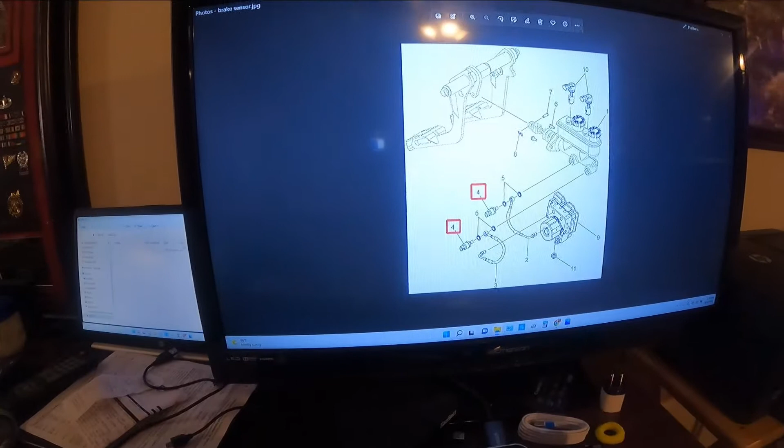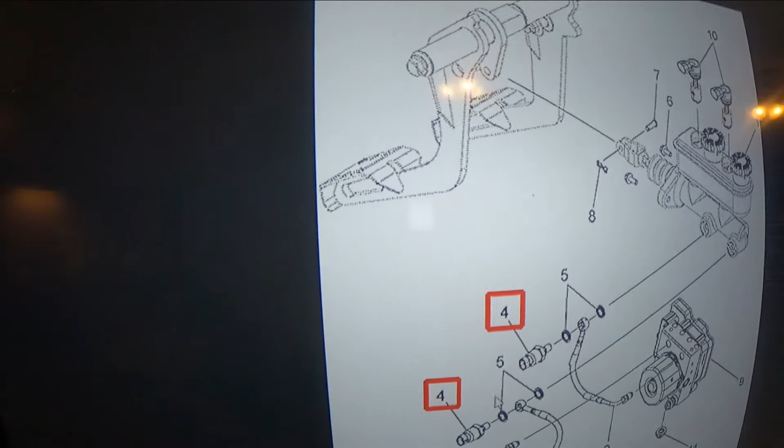So this is the master cylinder for the Slingshot. You'll have your two sensors up here, and then these two sensors right here in red are the ones we're going to replace. In the kit it comes with these two sensors here and four washers with O-rings in them.

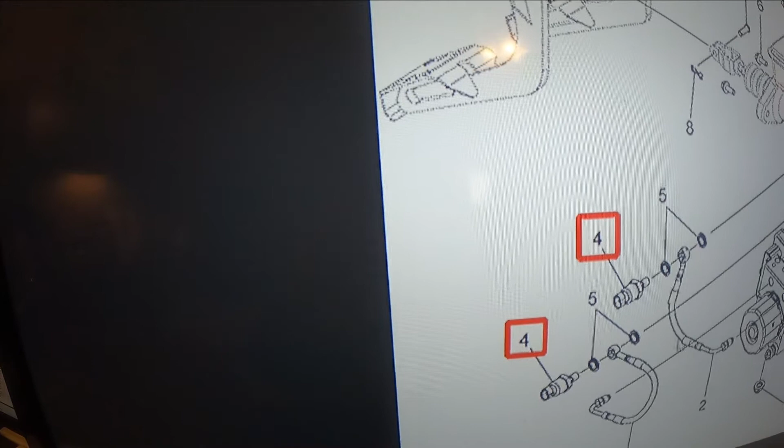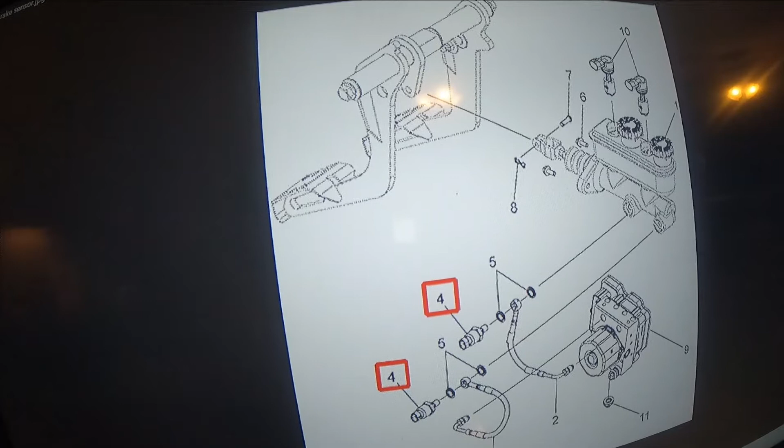And then these little brake lines right here are already on your Slingshot. Now you really can't see this on the Slingshot because it's hidden behind a tube that runs right along this master cylinder. So when we get out to the Slingshot, I'll be able to show you that, and then I'll show you here in a second where I got it from Amazon.

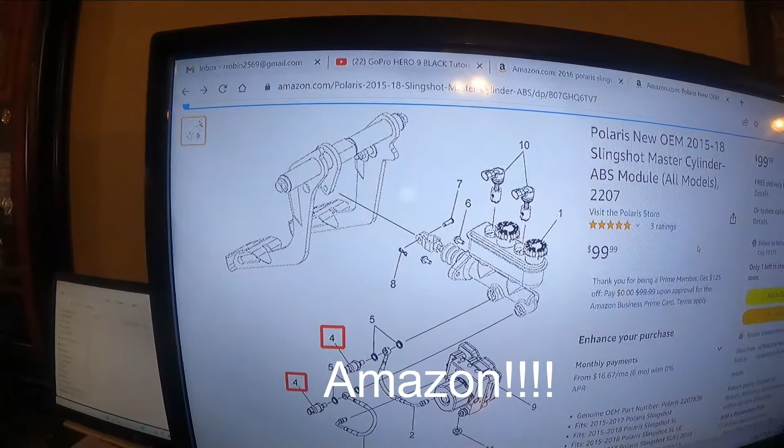So this is where I got it from Amazon, and I'll put the link down in the description. It's for a 2015 to 18 Slingshot master cylinder ABS module. It was $99, and these are all the different models that it fits.

Without further ado, let's go outside and see what we can get into.

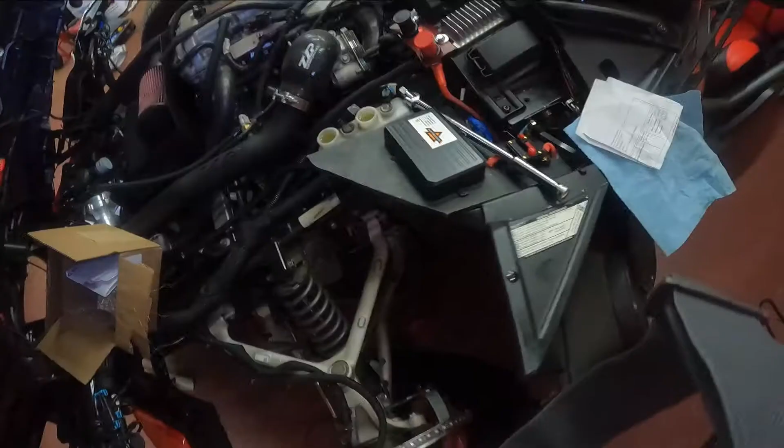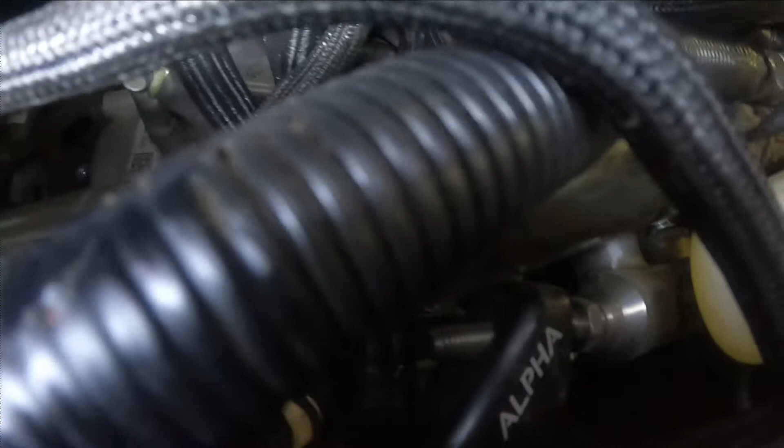All right, so here's your master cylinder. Of course I've taken the tops off, and the piece that you want to replace is down there. That silver piece is the back one, and then the front one is a little further up right there. So basically they're a 3/4 or 19 millimeter.

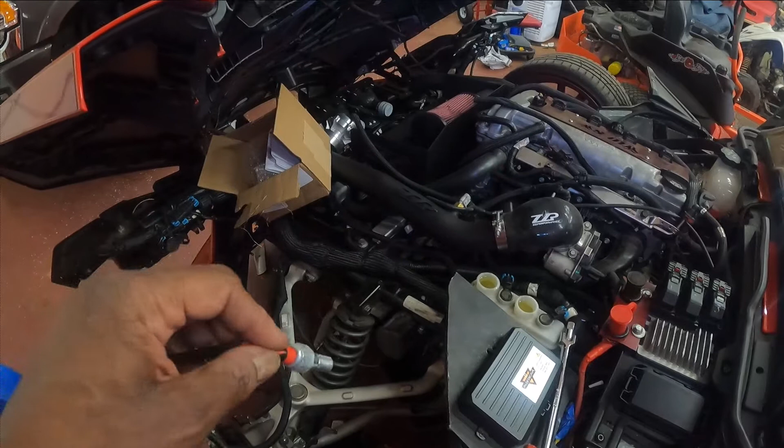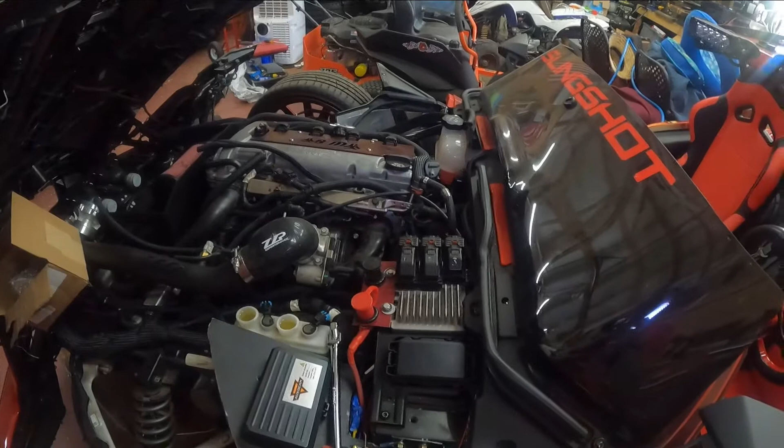So these are the old ones. I've already replaced them. I'm just trying to catch you up to what I've done so far. Again, in the box you'll get your instructions on how to replace these.

And this is what the new ones look like. They're black.

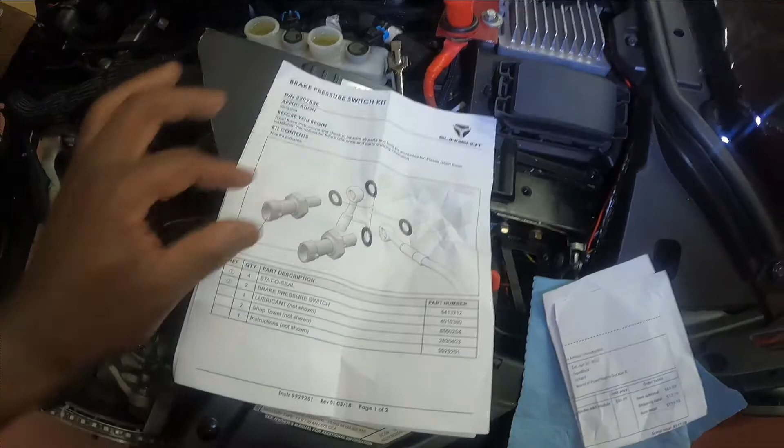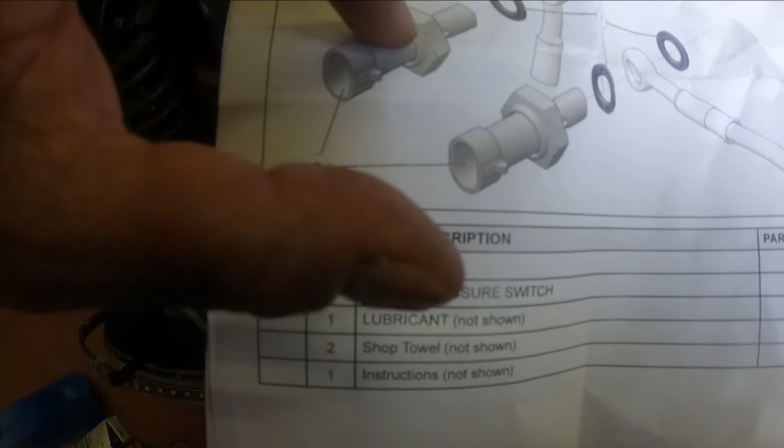This is the way you put them together. You got to have that silver O-ring with the black grommet in the middle. You stick it on first, make sure it goes all the way against this nut right here. Then you stick your brake line on, and then you stick the second washer on, and then you screw them in.

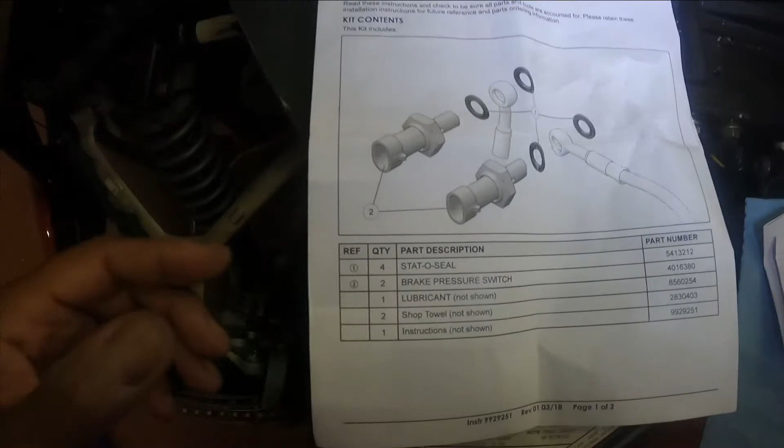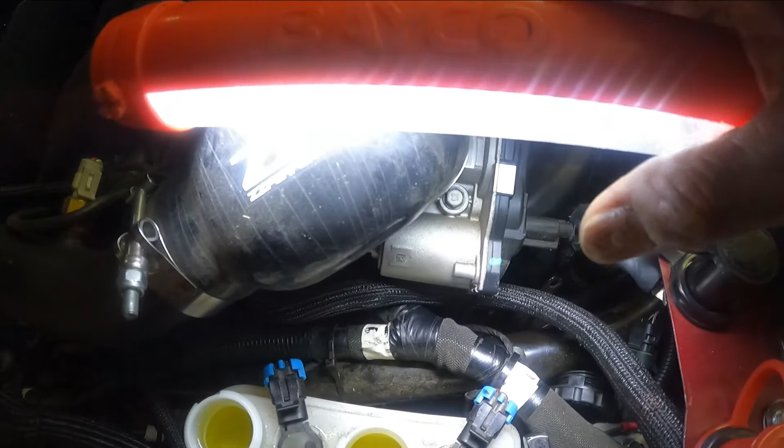The best way I found to get to this back one, so you don't have to take the manifold off, which is this black thing right here. If you don't want to have to take all that off, along with your throttle body and all that good stuff, you can get a wrench down here to be able to tighten it. And of course you're only going to get like a 1/4 of a turn, but you still can get to it from right here.

This one over here, you'll probably have to take a wrench and go behind this cable right here, this wire loom, or you can get to it from down on the side here.

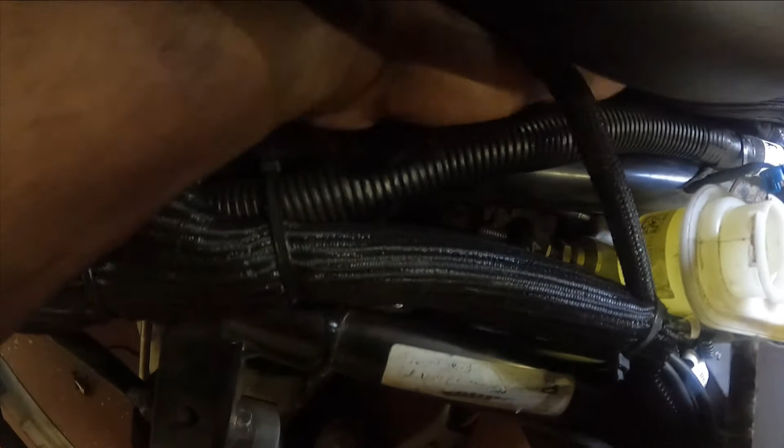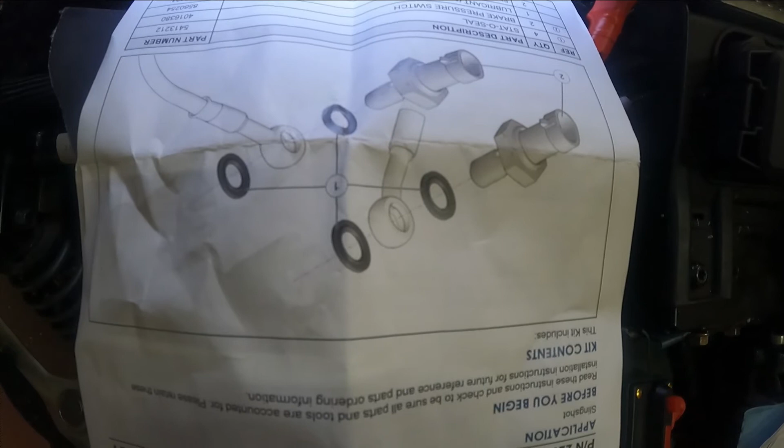Again, when you look at these, this is how it looks. This back one goes straight down. This one on the left side, this front one, goes to the left. So just make sure you orient those to the way they're supposed to be.

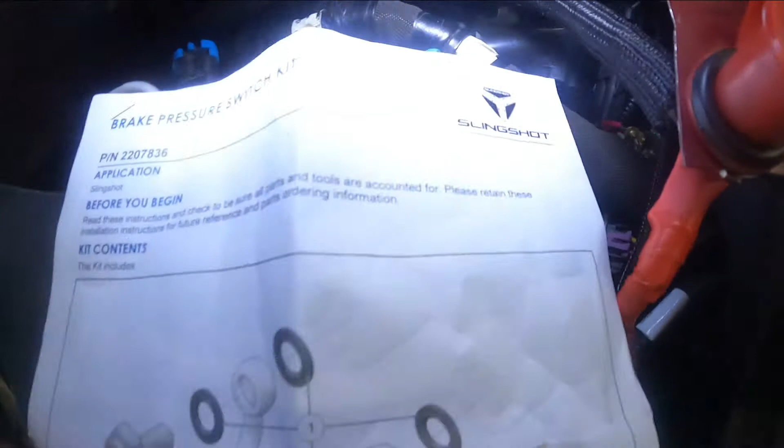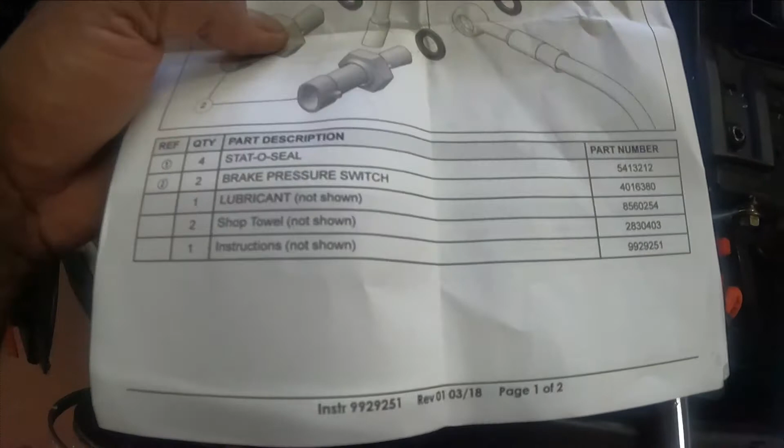Again, this is an actual Slingshot 100% OEM part. There's your part number, and down here is everything that's in the kit. Again, I'll link all that in the description.

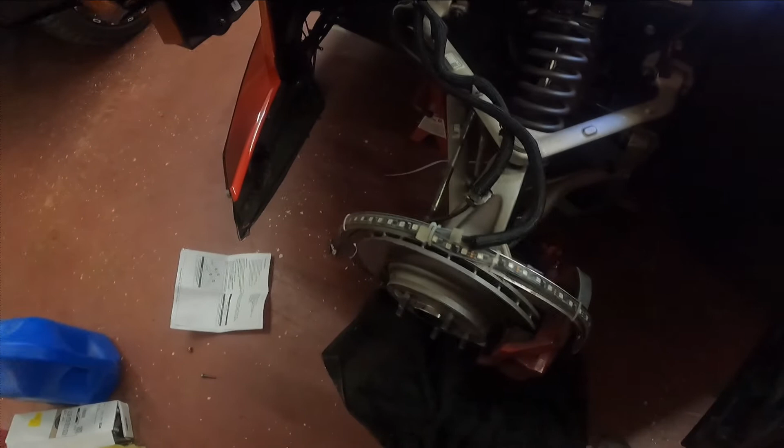I have taken my tire off so y'all can actually see this thing bleed. And of course I spilt some down there, but that's okay. We'll get that cleaned up.

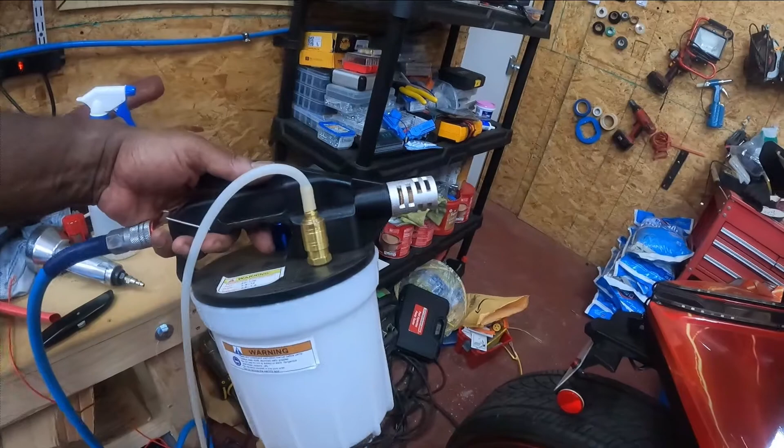So what I have to bleed these is this brake bleeder kit. It's for a do-it-yourself when you don't have any help, and it's pneumatic, so it's plugged into our compressor right there.

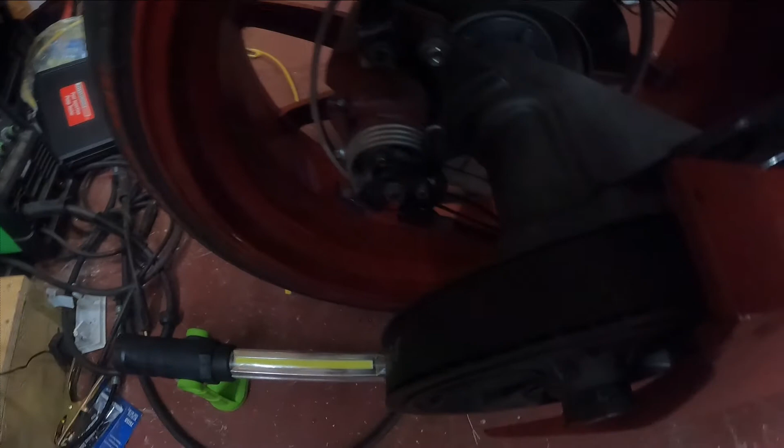Basically this turns the light on for you. Here is your bleeder, and you want to start with the one furthest away from the master cylinder. It comes with this hose, and we will just take this in and plop it on here. Just like that. Basically when you squeeze this, it will start pulling air in.

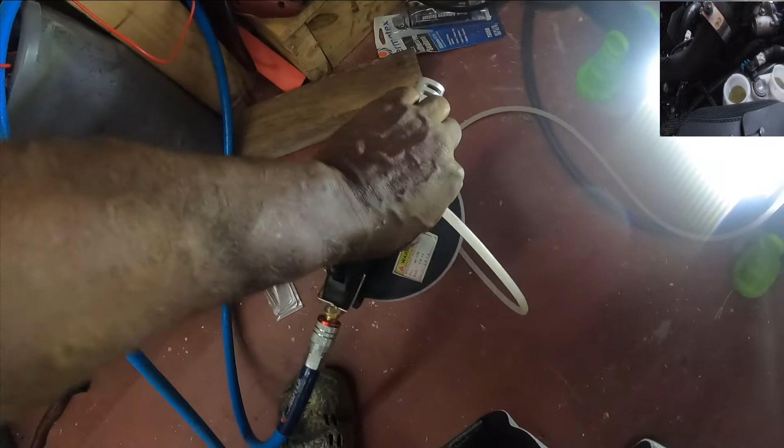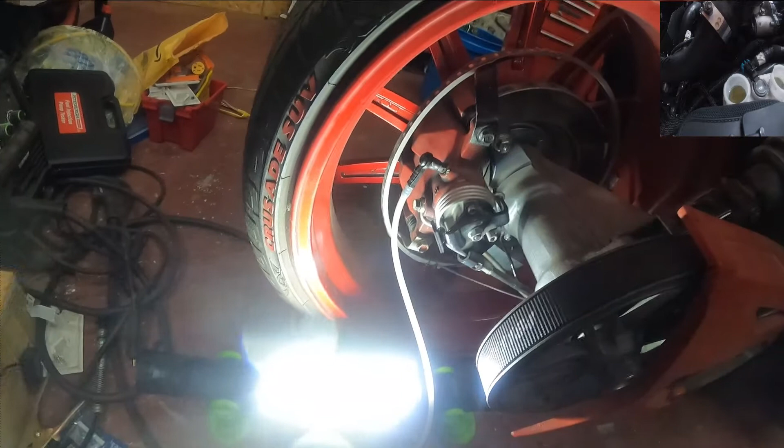So it'll start sucking air. I'm turning my compressor off because it gets really loud. And what we'll do is we'll crack this open, it's a 10mm, so right here, just like that, it's cracked open.

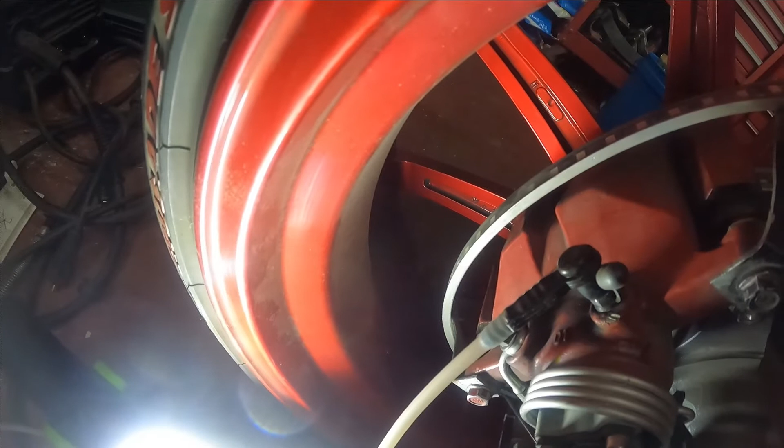What'll happen is once you start pressing this handle, it will start sucking that fluid from the reservoir down in here. And just like that, we are good to go. So we'll go up to the front and we'll do those.

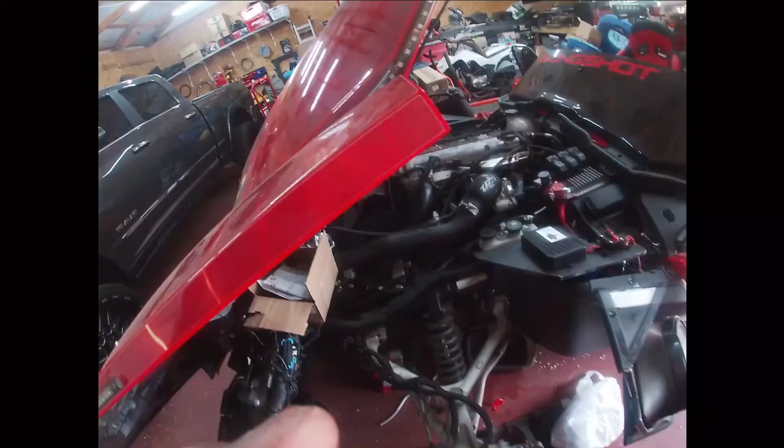All right, YouTube, we got our brakes bled. We used our pneumatic brake bleeder. Again, it's really easy. I did have to come in here and press the brakes probably about 30 times before they hardened up. But now they're hard, so they should be good to go.

I know I didn't go into a lot of detail on this, but as always, if you have any questions, always just leave them in the comments and I'll answer you as soon as I can.